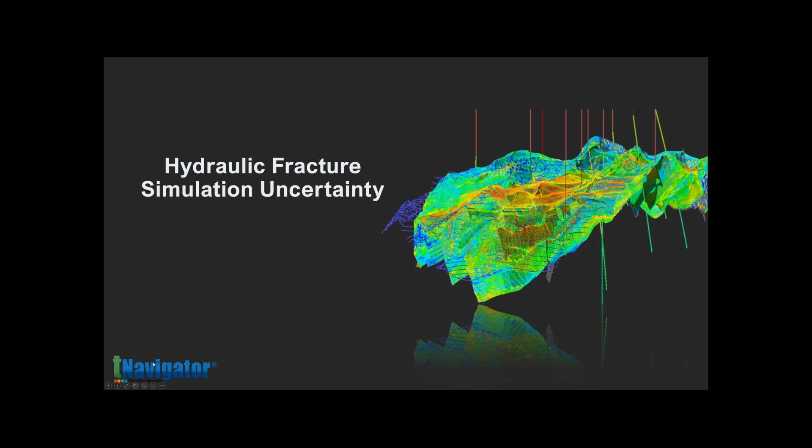Hi everyone, my name is Eddie Evans and I'll be showcasing the hydraulic fracture simulation uncertainty webinar. This is going to be a relatively short webinar, so we'll cover some of the more basic uncertainties and the ones that are the most common that are seen when we do these uncertainty studies for hydraulic fractures.

So to begin with, let's go over a really brief overview of our agenda. We'll go through a short introduction of what tNav is, how it works, and what it does. We're going to discuss hydraulic fracture in tNav: how you make hydraulic fractures, what your options are, the advantages and disadvantages of each one. We'll go through the uncertainties to be covered in the software demo. Then we'll see a software demo in video form, and we'll end up with some Q&A sessions. Okay, so let's go to the next one.

So the first thing to know is that tNavigator is a fully integrated solution. This large scope of functionality covers anywhere from geomodeling to PVT to SCAL, basic RE things, optimization, wellbore modeling, flow assurance, and geophysics. So it's a fully integrated package that allows for very deep and rigorous analysis and processing of the input data, in addition to the simulator itself.

The big advantage of this integration is that you can leverage your entire asset team's expertise in a way that you don't lose a lot of data. Your tribal knowledge that gets used to build a model doesn't disappear because you export it out of one software into another. So it allows you to leverage everyone's expertise and also collaboration to make a more robust study of what you're trying to achieve.

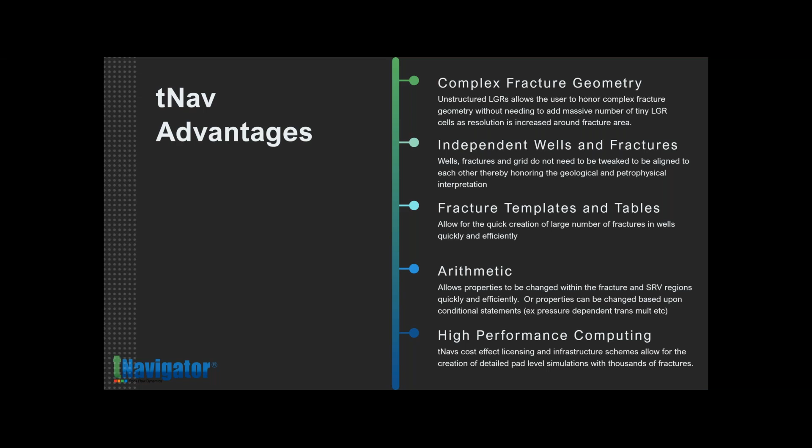And we also leverage this. All this is enhanced by the fact that we have high performance computing in tNav, which means that it's very good to make large number of parallel cases to run millions and millions of cells, which gives you the ability to run pad and field level simulations with thousands of fractures and LGRs.

Okay, so let's talk about the uncertainties to be covered in this short webinar. We're going to go through fracture geometry, things like half length, height, SRV, how big the SRV should be around your fracture. All this can be done in Model Designer, and the video will start off not with how to create the base case, but how to create the uncertainty from there. Fracture spacing, we'll go through as well. Basically, the cluster spacing, how close or how far apart fractures can occur.

Fracture properties, how to change things like perm, how to change the saturation number and rock compaction number so that they switch between rock compaction functions or saturation functions, and also well spacing, basically how I can shift my wells closer or farther apart so that I can create the spacing study.

Okay, so now we'll go ahead and look at the video demo and how to make this an uncertainty study, right? So what's really neat in tNav and Model Designer is that we have a workflow editor that works the same way as you would have a Python script. It actually works a lot better than a Python script because we have built-in commands and we're also Python compatible. So right now we can divide our uncertainty study basically between 4 parts. We want to do fracture geometry, fracture spacing, fracture properties, and well spacing, right?

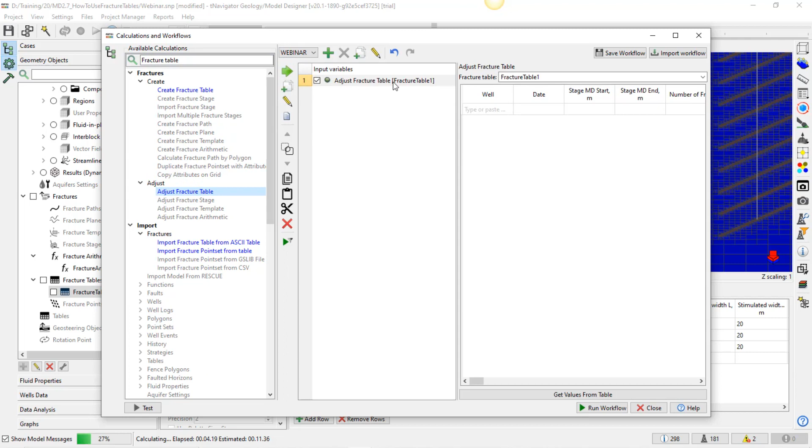So let's do the fracture geometry. The cool thing is that both fracture geometry and cluster spacing, you can vary both of those in the fracture table. So I'm going to add a fracture table, adjust the fracture table, and add it here. Now I'll say get values from table, and as you can see, the table has populated with all the things.

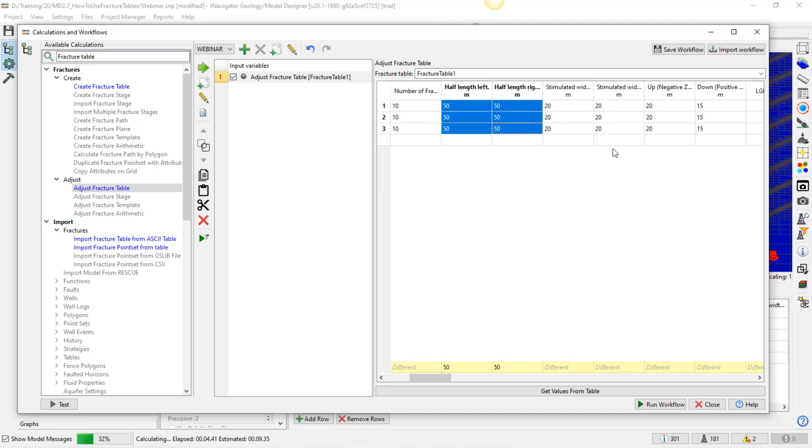Let's first do the fracture geometry. So we want to change the geometry - we want to change the half length, the height, and the SRV. Let's do that.

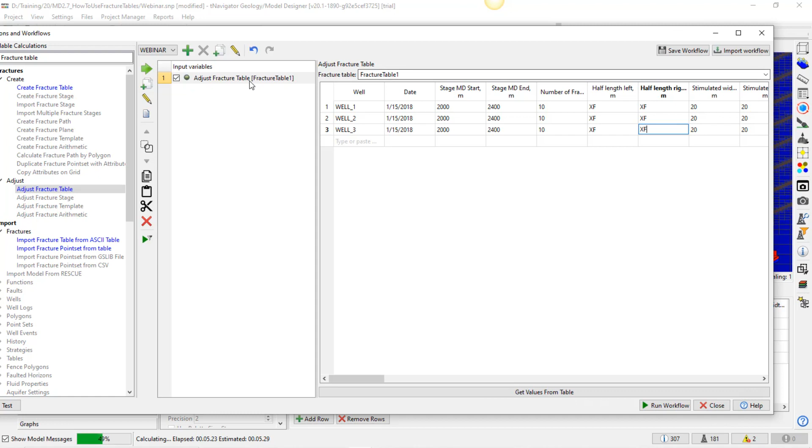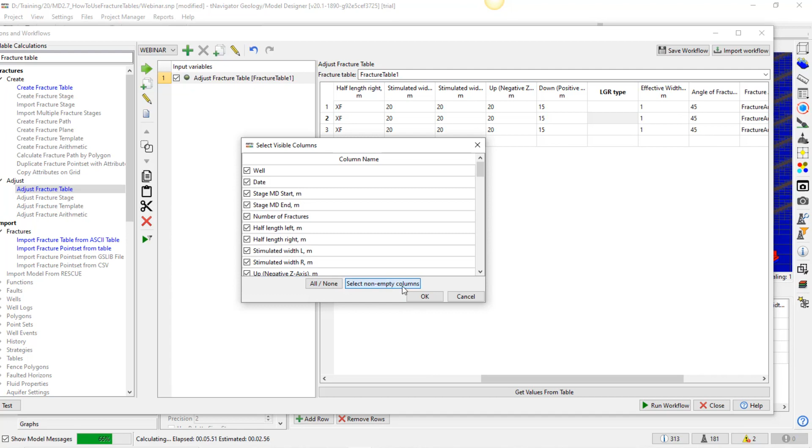The next one I can vary is fracture height, so I'm going to call it HF. The maximum is going to be 40, the base is going to be 20, and the minimum is going to be 10. So I'm going to come from input variables to adjust fracture table, scroll over to the right to select non-empty columns so you don't have too many, and type HF, HF, HF.

So that's HF. Now we want to do the SRV size. The maximum is going to be 30 feet, the base value is going to be 20 meters, and the minimum is going to be 10 feet. So once again, I'm going to come over here and say SRV, SRV, SRV.

Okay, so that covers the SRV, right? So that covers geometry - we have fracture height, fracture half length. Everything is geometry till now.

The next thing to do now is cluster spacing. Now this one's really neat because I'm going to call this spacing for cluster spacing. My start value, I'm going to say there's going to be 15 clusters per stage maximum, minimum there's going to be 5. Base value there's going to be 10 because we have 10 right now, and minimum value is going to be 5. So I'm going to call that spacing, and come over here and say number of fractures, spacing, spacing, spacing.

And that covers fracture spacing. So right there, we've already covered 2 out of the 4 - we've done fracture geometry and cluster spacing as uncertainties. The next thing to do is fracture properties.

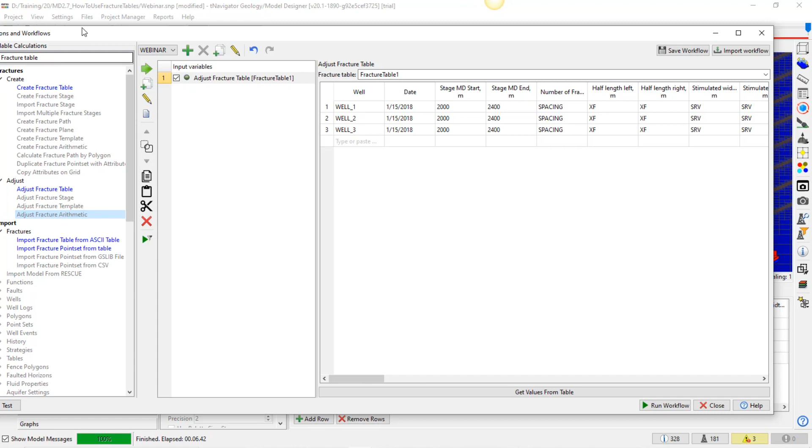Now, to change the fracture properties, we use the fracture arithmetic. So I can come here and say adjust fracture arithmetic, and highlight it. Here is adjust fracture arithmetic - I incorporate that as step 2. I say get values from arithmetic. In this case, I only have 1, but if I have different ones, I had to drop down.

So there we go. Let's do the next uncertainty - we're going to say fracture perm, so I'm going to do KF. Maximum value is going to be 750 millidarcies, base value is 500 as it is now, and min value I'm going to make 250, for example. So I'm going to say KF, KF, KF. Okay, so that's fracture perm.

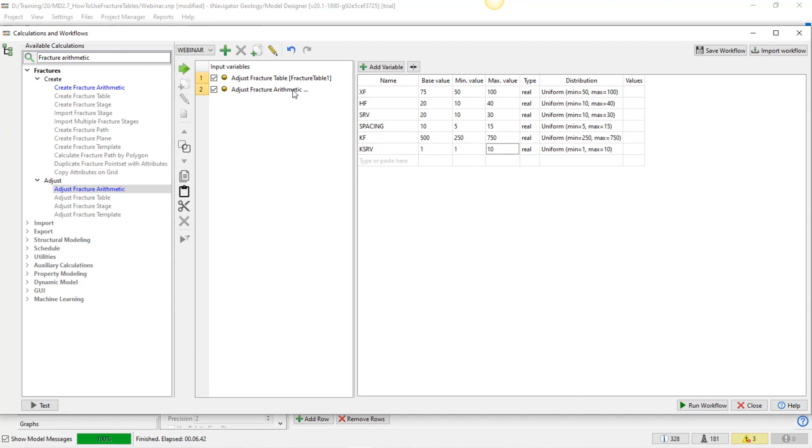Let's say I also want to vary this perm for the SRV, so I'm going to do KSRV. And the KSRV is going to be from 1 to 10, basically unchanged. So I'm going to do KSRV, like we did before, KSRV, KSRV, KSRV. Now we're not going to change rock num or sat num because those are not uncertainties.

But we will vary the endpoints on the rel perm, and we can also vary the amount of compressibility. So let's do the first one.

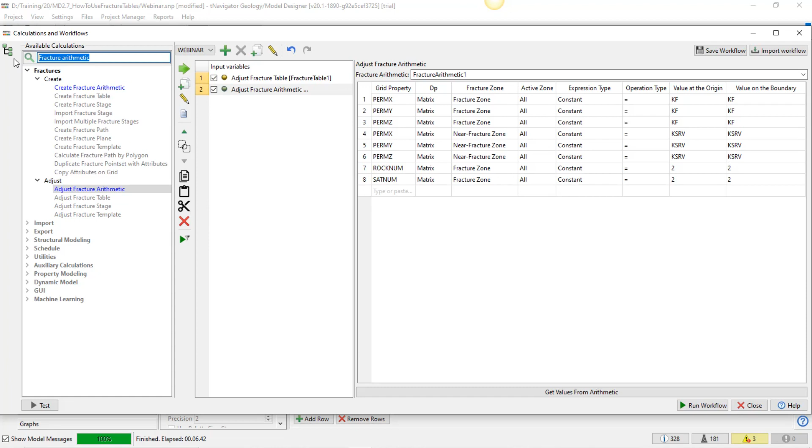Let's do rel perms. So we go on adjust analytical relative permeability table, I'm going to add that. Come over here and say get values from table, and I'm only interested in changing the fracture table. We're going to keep this simple and create a variable for critical water, SWCR. I'm going to go from 0 up to 0.25 - actually, maybe 0.15.

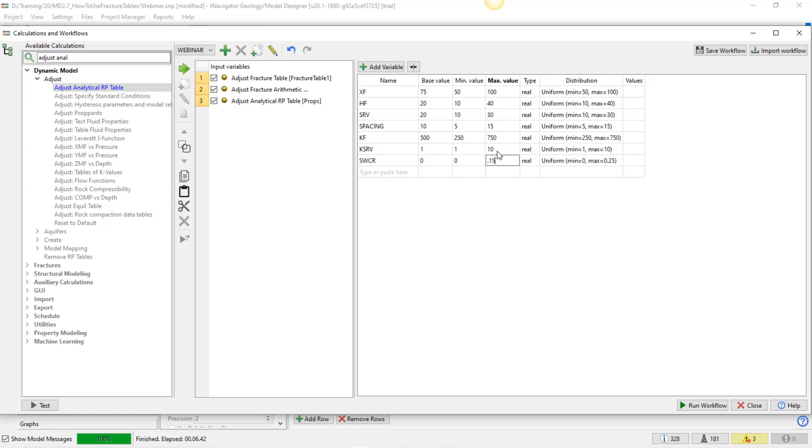It's better, so it's not too big. Same thing, I come and say okay, I want to set SWCR, and that is now a variable.

That covers that variable for any of these inputs to the Corey correlation. So if you don't think it's exactly straight line rel perms, you can come in here and make your Corey exponent for the oil water curve not 1, but go between 1 and 3, and maybe that helps you better.

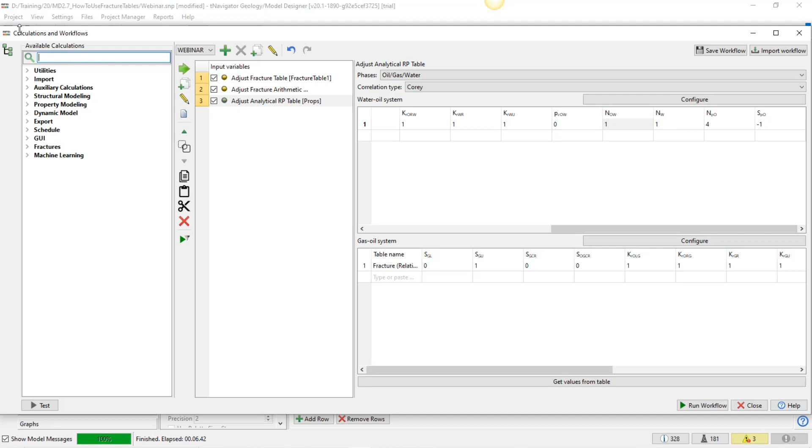That covers the Corey exponent. Let's also do the rock compressibility now. Adjust rock compressibility, and I'm going to say fracture restore table, and I'm going to make this a variable.

So I'm going to say input variables, rock comp, and this was, I'm going to go from value 1.5e to the minus 5. Minimum is going to be 1.4e to the minus 5, and maximum is going to be, let's make this 1.0e to the minus 5, and this will be 2.5e, 2e to the minus 5, to make it easy, and press it. Okay.

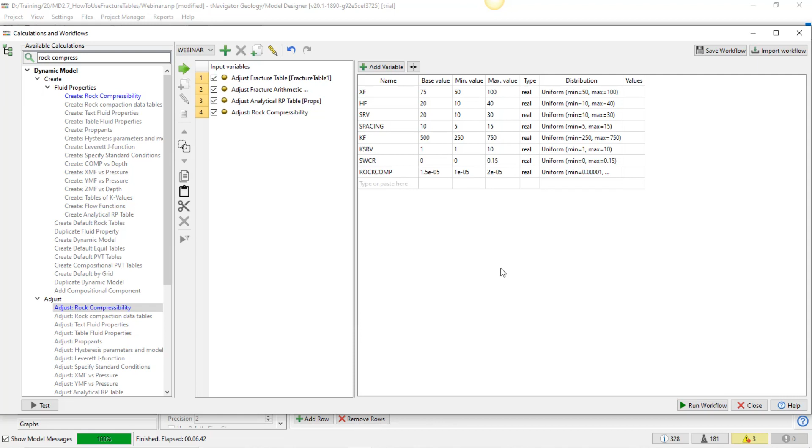So that's rock compressibility. I come in here, rock comp, and there you go. Now rock compressibility is an input variable. So that covers fracture properties, right? We've changed the perms, we've changed the SRV perms, we've changed the critical water, we've changed the rock compressibility inside the fracture area. Now, what else can we do?

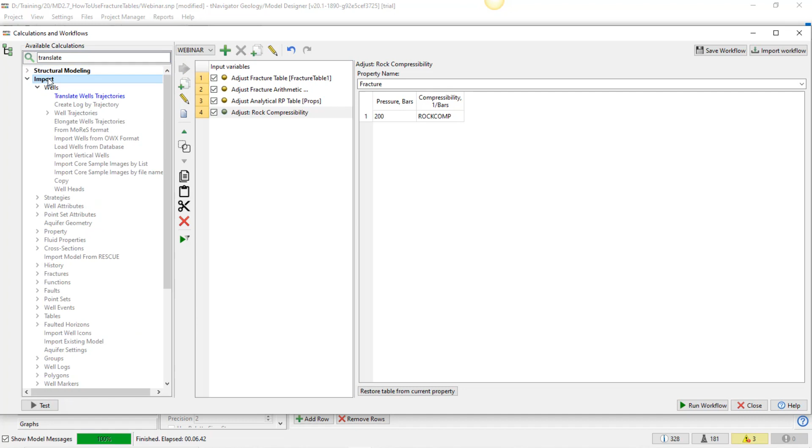Well, the last thing we need to look at as an uncertainty is well spacing. So for well spacing, I'm going to go in here and shift my wells, and I'll show you how that is. So I go to translate, and import, there's wells, translate well trajectories, right? So this would be the step.

Now notice that there's a well filter. You may have to create a well filter. In case I've already created one, but I'll show you how to create one right now. So I need a well filter to just target my change only to one well at a time.

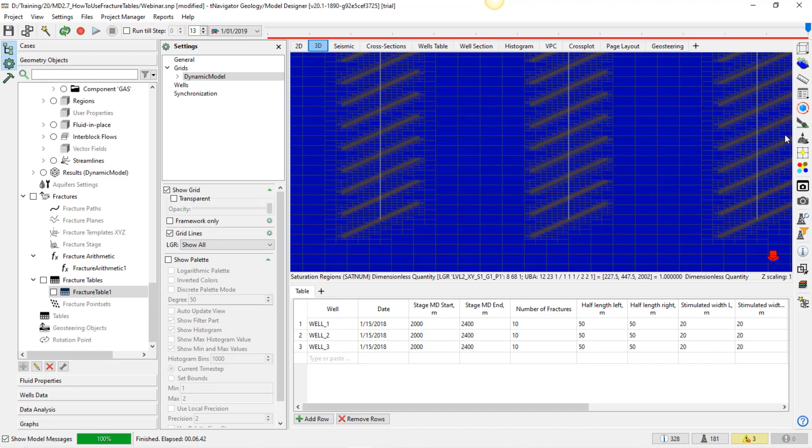So I'm going to close this webinar workflow. I'm going to come in here to the well filters button, and I'm going to show you how I created it. So you press the plus button, well filter 1, or in this case well 1, and in well 1 you click on the pencil button, and you basically say, let me see, remove all. I'm going to say okay, well 1, add to filter, well 1.

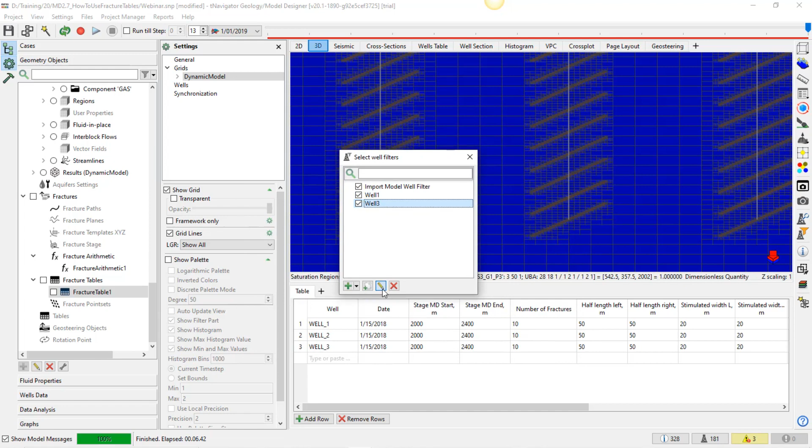Right, and you basically do the same thing. Well 3, it used to be here. I click active filter, well 3. So if you go back to the workflow, once you've created the filters, I can say okay, well filter, this only applies to well 1.

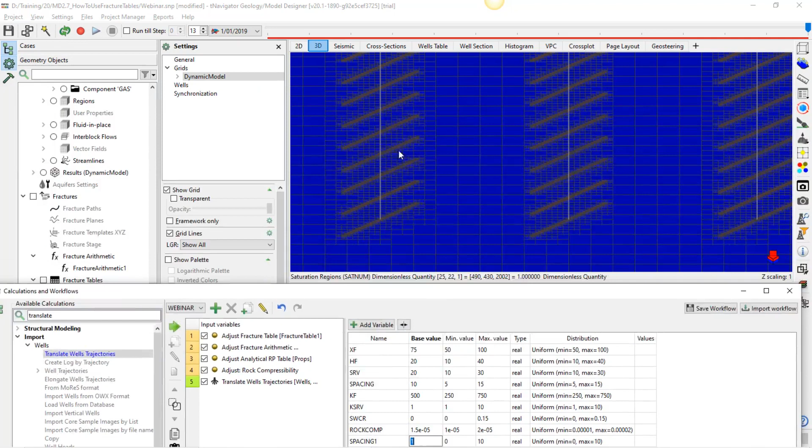I'm going to shift, so I'm going to call this spacing 1 for well 1. And I want to shift my well 1, which is this well, and I want to shift it along towards well 2, which, if you can see at this bottom status line, it says from well 1, which is this one, to the right is positive x, right?

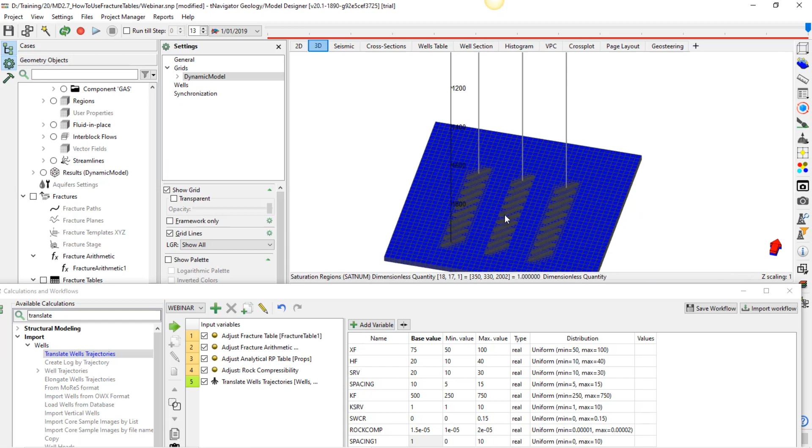So positive x. So I want to say okay, well 1 can go from 0 feet, so basically it stays where it is. The minimum value is 0, so it's not going to go further away for now, and the maximum value is going to be 50. I can always make this negative 50, but then I have to do a couple other things to make it go left concurrently with the other one.

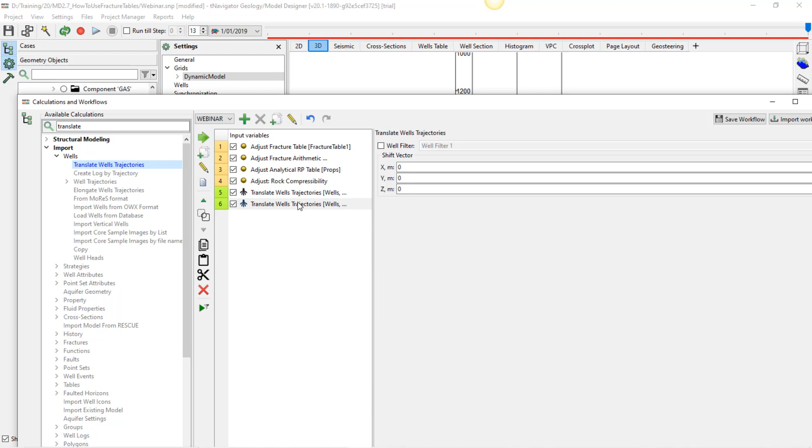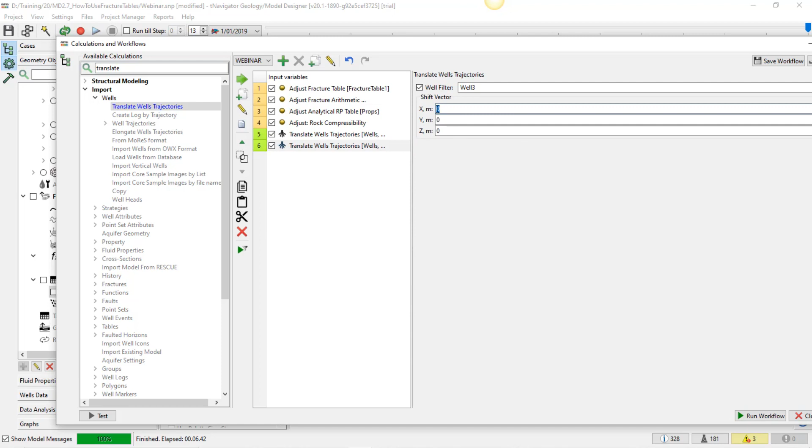So that's well 1. So I'm going to come in here, 0, spacing 1, shift along the x. I can add this rule again to translate well 3, right? And same thing, I'm going to call this spacing 2. In this case, it's going to be the opposite because I need to move it closer to well 2. So I'm going to do 0, negative 50, 0, and spacing 2, right?

Now the last step to do it, we'd have to go in and say export case or export model, and I add that rule, and now this export model, I can press close, right? Or I can press test. Everything seems to run fine. Okay, so now that I'm here, what do I do?

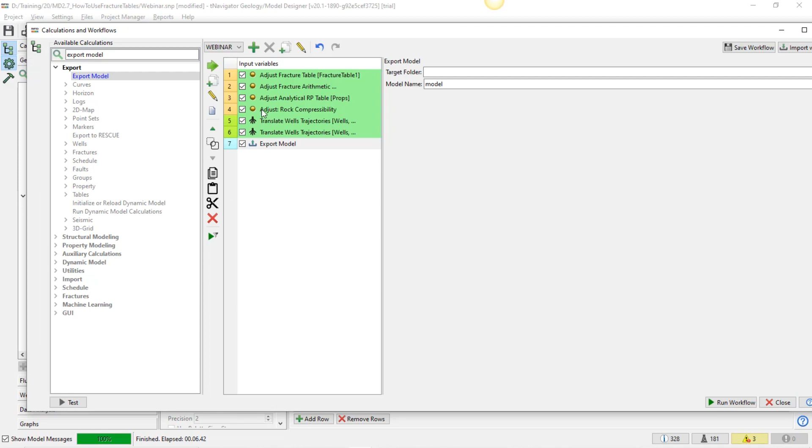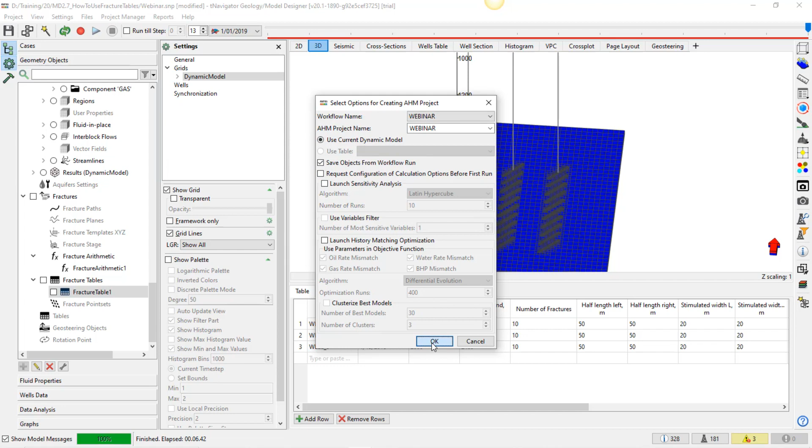Well, now I can actually create an AHM case. I have a workflow, which is this one, that has steps, that has variables that need to be changed to create the case, right? So now what I can do is I can actually go to this little wand button, say create AHM project, and call this webinar. And I can press OK. I can even launch directly from here, but for now I want to press OK. Yes.

It creates the thing. So for now, so I can show you the results, I want to say write wells. I'm going to say write all results. That means 3D results and everything, so I can showcase the final results.

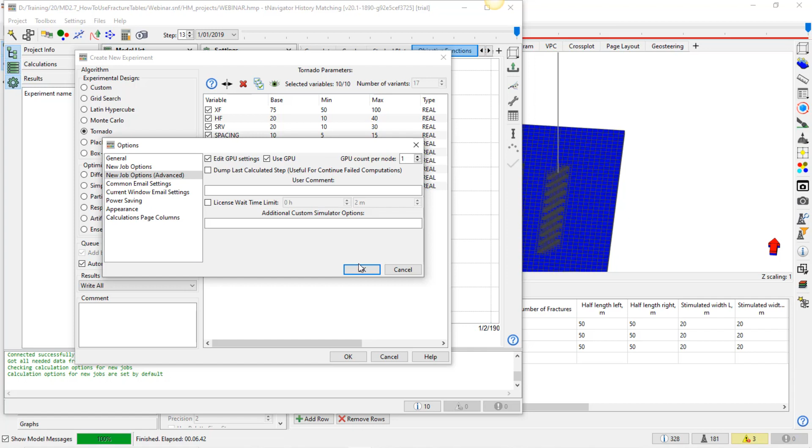I'm going to do a simple tornado for now so we can see the effects of min and max for each one. And I'm also going to change one quick thing in the options. For new job options, I'm going to tell it to use my GPU, because the difference between no GPU and GPU in cases like these LGR cases is an acceleration of like between 30 and 80% of simulation runtime. So I'm going to press OK, and then I'm going to press OK.

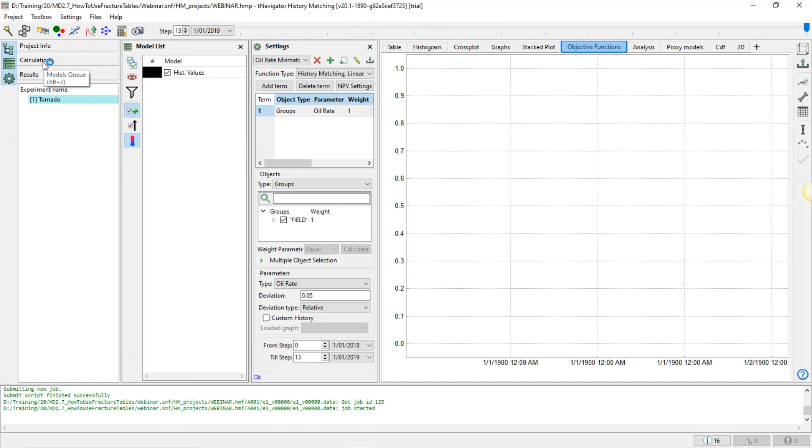And basically at this point, what happens is the tornado plot algorithm is going to start launching cases on its own. Okay, so let's take a look at the results that we have from our tornado launch.

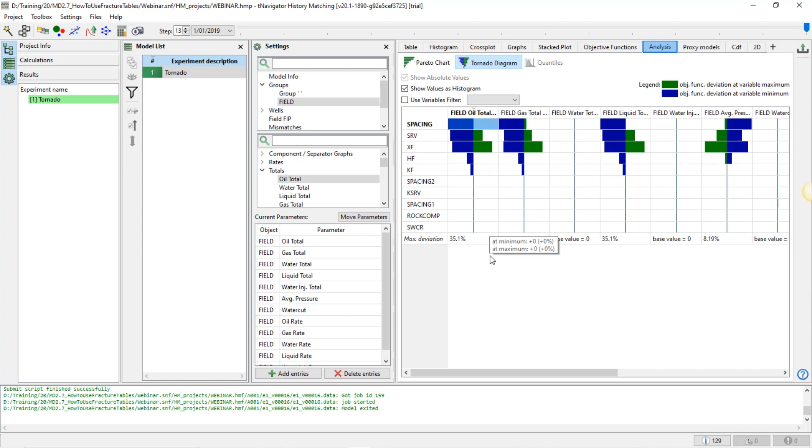But let's take a look at how the results actually look. So I can click onto the table tab. In the table tab, I have XF for half length. So case 0, which is the base case, has a half length of 75 meters. And case 1 and 2 are 50 and 100.

So I can right click and say view results to view the results. In this case, I've already pulled them up in the background. And we can see how we have - there's just the 001, which is 50 meters, and you can see that it's really short. And this is the 100 meter one, which is really long.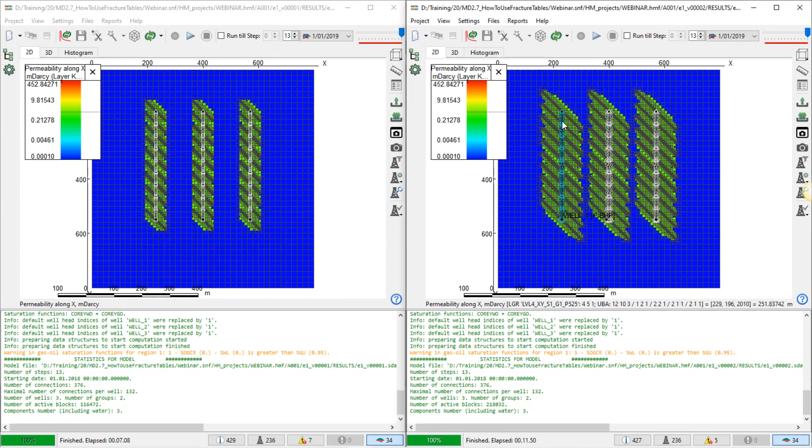So you could go to 150, and if I were to go to 150, these would intersect, and these fractures would actually interact with each other. So that's how we could do a very good half-length spacing study based upon half-lengths. But we'll also look at the next one, the actual well spacing. The next ones I'm going to show you.

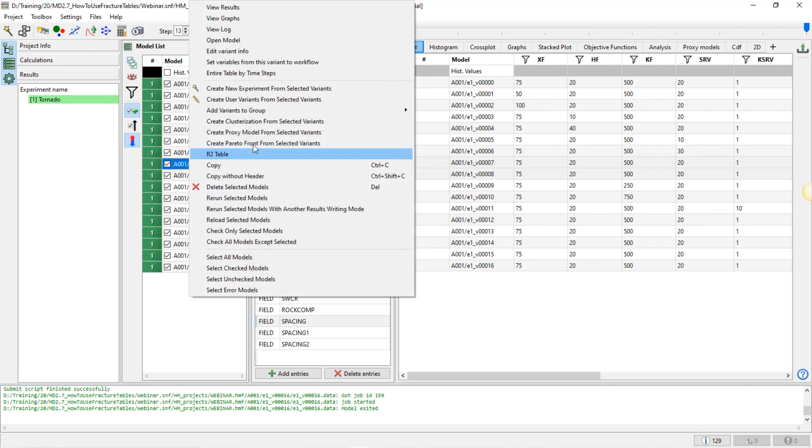All right, so let's take a look at cluster spacing. Since all of these are basically the basic geometry that we already saw is sort of working, the next one I want to do is spacing. So I'm going to come over here, look for the spacing one, and spacing - this is cluster spacing, which are cases 7 and 8. So I'm going to right click and say view results, and I have 7 and 8 already up.

And as you remember, for cluster spacing we had 5 clusters in the stage, and for the low and for the high we had 15. So you can see here's 1, 2, 3, 4, 5, and you can see clearly here it's a very high density, and that's 15 clusters, right? Okay.

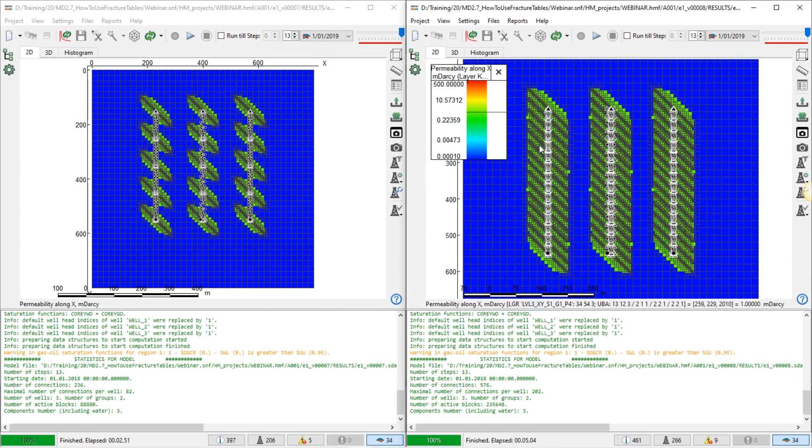So for the last thing we're going to view the results for the last spacing 1 and spacing 2. Now if you remember, we were treating each well as with an independent spacing type function, but you could change the spacing type functions as much as you want. So this one's just to show you can shift some wells to the right and some wells to the left.

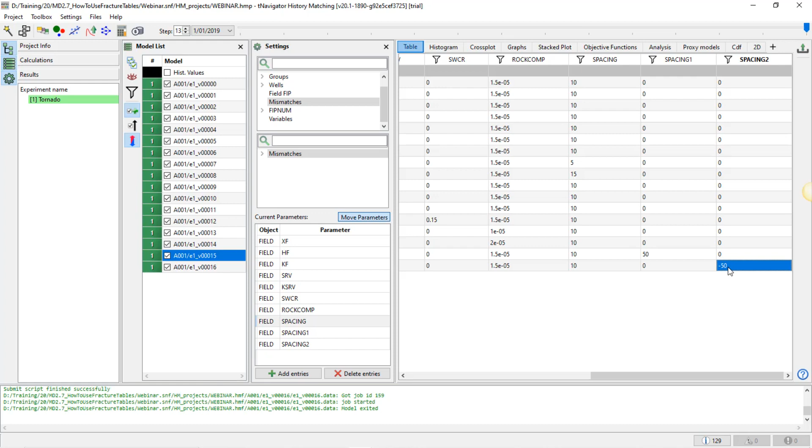So what I'm going to do is I'm going to write the same thing. I come in here to table, I figure out spacing 1 and spacing 2. These are the 2 maximums, and since the minimums are 0, it doesn't really matter. So we can take 50 to the right, and 50. Well 1 is going to go 50 feet to the right, and well 3 is going to go 50 feet to the left. And if we right click, we say view results, we can view the results.

And this is a case for well 1 right here. Goes 50 feet to the right, and as you can see, it moves closer. And there's this base, and the original one that you can see here, is where well 1 originally was. There was about this amount of space, about 2 global cells. There's now no space, and between well 3 and well 2, it's shifted, as you can see.

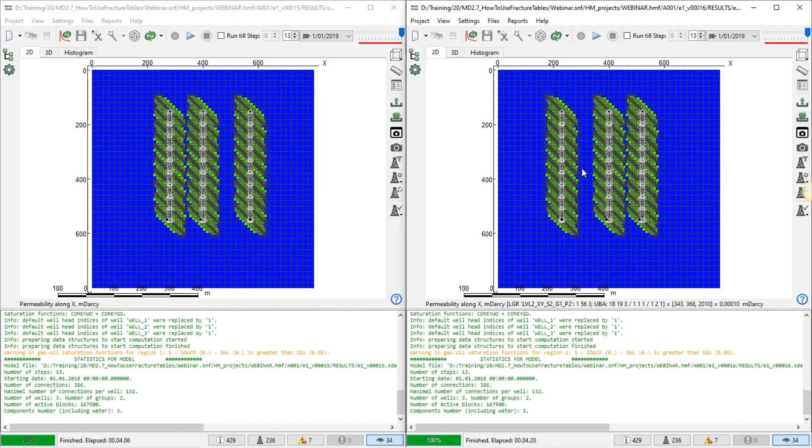That's just to showcase how you can shift the wells. You can make a function that offsets this well 100 feet, 100 feet, 100 feet to the right or to the left, depending on your point of origin. So see, and this is what's really neat. Because of these unstructured LGRs, you can actually get another fracture cell in the same global grid running parallel to the other fracture cells. And we were to stretch these out a bit more.

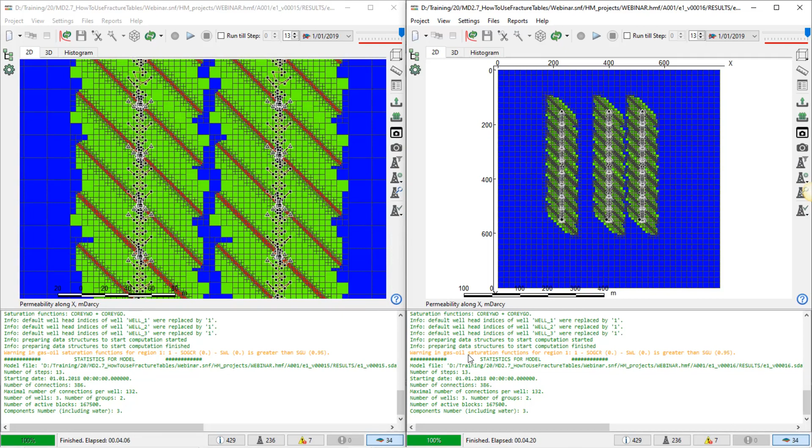Okay, so that's the end of the video. And basically, in summary, oopsie daisy. Oh.

So basically, in summary, we have three different levels of things that we can say. AHM lets us leverage both the simulator and Model Designer to create these very rigorous, highly detailed studies with large amounts of uncertainty. Model Designer allows us to create these cases quickly and have a base case.

The one thing I didn't showcase in the video that's really interesting is if this were a history match instead of an uncertainty study, I could right click on the best case and say send variables back to workflow in Model Designer, which means that in Model Designer, where I defined all those variables, the start value gets replaced by the best case, and I can hit run on that workflow, and it'll essentially spit out the best case, and now that can be your starting case for a forecast or whatever you want to do in the future within Model Designer.

That also allows you to have very complex fracture geometry, very complex different regions within Model Designer, so it's very flexible in that sense. It's a lot more flexible than doing it in a deck for things that involve geometry versus just simple changes based on IJK indexing.